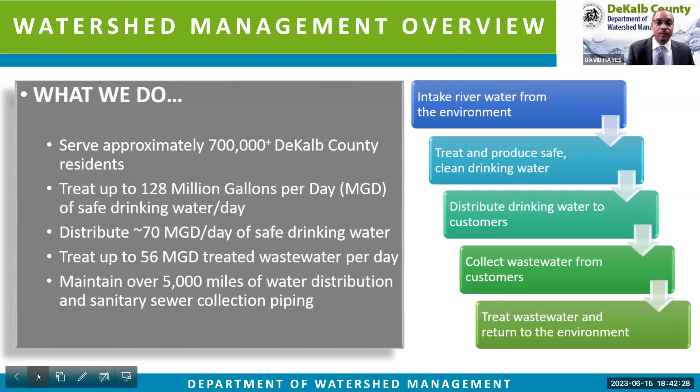So again, why are we here this evening? Well, the DeKalb County Watershed Management Engineering Division is leading this effort to decrease the water main breaks we've been having in this area, to upsize the water mains because we are continually growing as a county. We want to make this system robust and meet the needs of the public. That's going to improve our customer service, and yield a better system to allow future growth and expansion for generations to come in DeKalb County. Next slide, please.

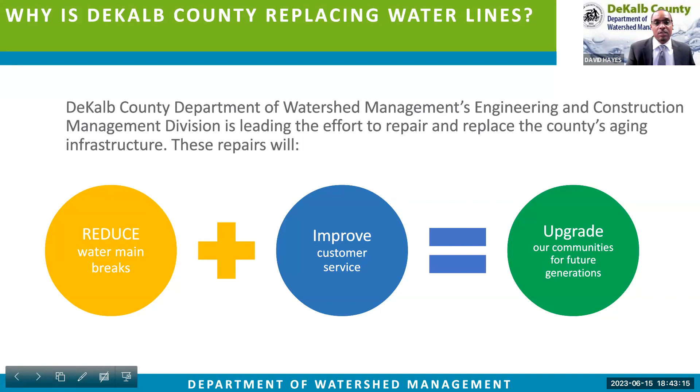This DeKalb Engineering Division put together what I call a super team, the A-team. This A-team is comprised of SDC, the company who's going to help—they're going to be the boots on the ground, putting this pipe in the ground. They're going to be overseen by AECOM and CGA Solutions, engineering firms who have helped us design the project, and who will help us manage the project to make sure the pipe goes in the ground on time, hopefully under budget, and with as little negative impact to the community as possible. We're here to do a great job, but we have to inconvenience you somewhat, so we're hoping with this A-team that the inconvenience is very reduced or minor.

Next slide, please. So next you're going to hear from Assistant Director Cassandra Marshall. She is the Assistant Director of our CIP group, our Capital Improvement Project group, and she's going to tell you more detail about why we're here and what we're going to do to correct this situation.

Ms. Marshall: Thank you, Director Hayes. Good evening. Again, my name is Cassandra Marshall. I'm the Assistant Director of the CIP program for Watershed Management. I have over 20 years of experience in construction management. I'm also a licensed water professional and a certified project manager. So in the next few slides, I will provide an overview of the system problems and our solution to repairing the aging water system.

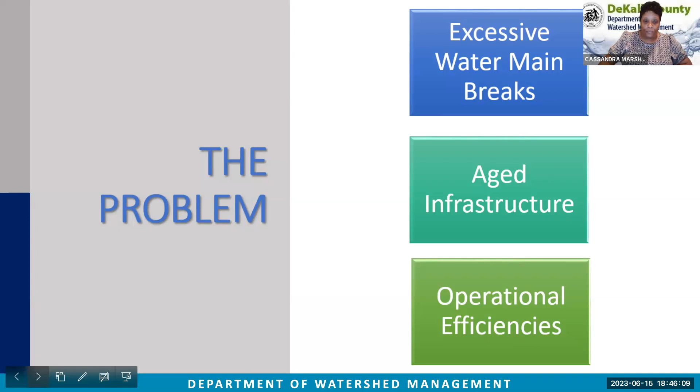At this time, I would like to discuss the county's first hydraulic model, completed in 2019. The county has over 3,000 miles of pipe in the water distribution system to maintain and provide drinking water to the ratepayers. We also have 4 pressure zones, 21 storage facilities, 16 pumping stations, and 6 pressure regulating stations. As you can see, this is a large system to maintain.

Most of the system is aged and cannot be repaired or replaced all at once. Therefore, the county had to develop a best practice way to evaluate and prioritize how and when the pipe will be replaced. The first objective was to create the model. A hydraulic water model is a computer simulation of the water system that can provide a big picture look at how the system should be functioning. To develop the model, we used the county GIS data, metadata of water usage from the billing system, and system facilities such as water storage facilities and regulating stations. This data was ultimately used to develop the county's first master plan, and it was used to prioritize the CIP projects. Next slide.

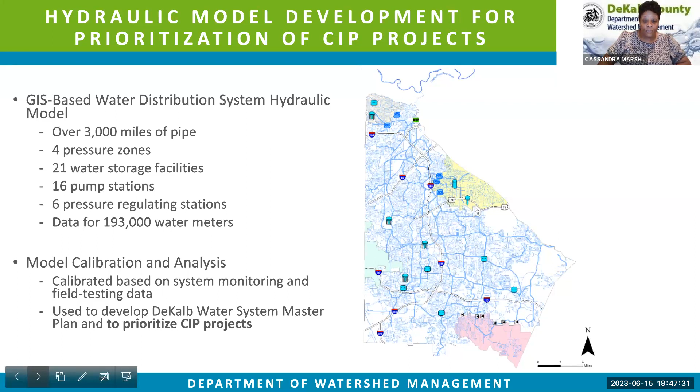So to this point of the presentation, you heard about the problem and the development of our replacement plan. Now I will speak about the solution and the execution of the CIP project.

So what does CIP stand for? Well, a CIP, or capital improvement project, is a project that helps maintain or improve an asset. It can either be new construction, an expansion, renovation, or a replacement of existing infrastructure.

In 2021, the Board of Commissioners approved a new CIP program for $2.4 billion for projects to be completed from 2021 to 2030. The Drew Valley Water Main Replacement Project is an $8.5 million project included within that plan. My team, the CIP team, is responsible for getting that work done.

My team includes 4 DWM construction managers and 12 licensed inspectors. Later in the presentation, you will also hear from the DWM construction project manager, Mr. Bacchus Jackson, who has over 10 years of construction management experience and is a licensed water professional. Along with in-house staff, we are also supported by consulting firms who help assist the county with construction management and inspection services.

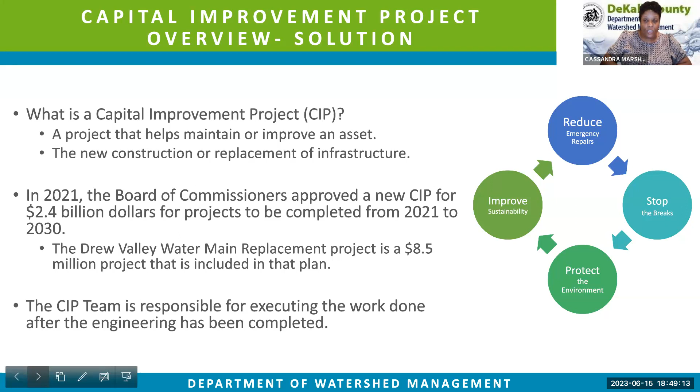What we want you to know is we're here to help. We want to reduce or eliminate emergency repairs. We want to stop the breaks. We want to protect the environment. And finally, after the project is complete, it will improve sustainability to the system. These improvements should last a minimum of 70+ years.

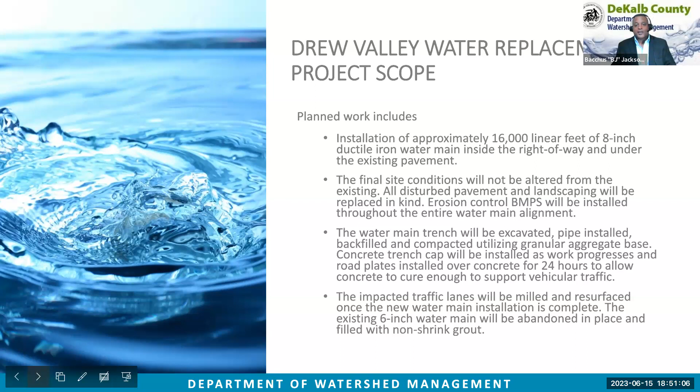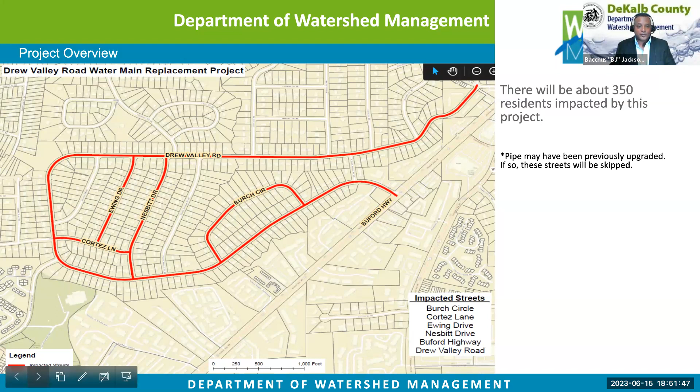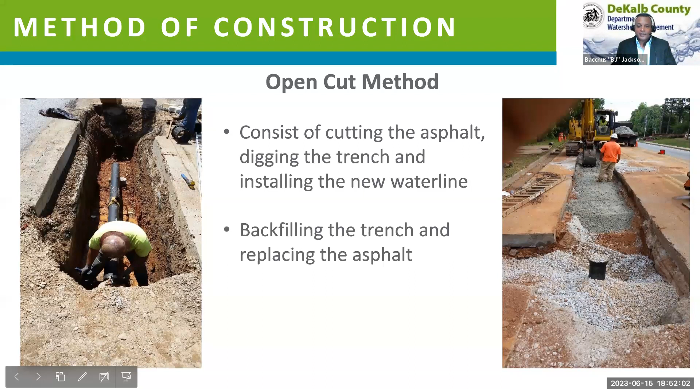Slide. The method of construction will be open cut. As you notice the illustrations here, it consists of cutting the asphalt, digging the trench and installing a new water line, and backfilling the trench and replacing the asphalt.

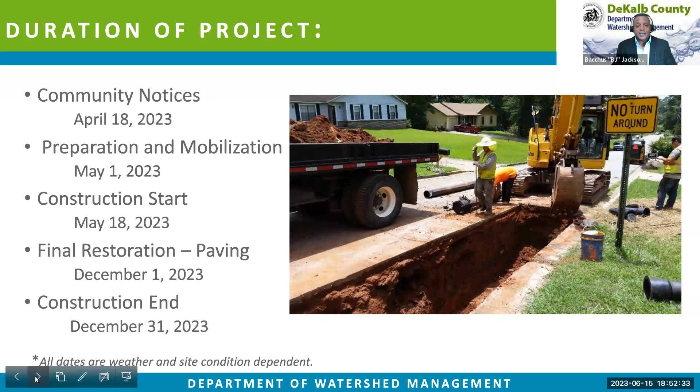Now, the duration of the project: the community notices went out April 18th, 2023. The preparation and mobilization was May 1st, 2023, and the construction start time was May 18th, 2023. Our final restoration for paving is going to be December 1st, and the construction end will be December 31st, 2023. Now, all of these dates are weather and condition dependent.

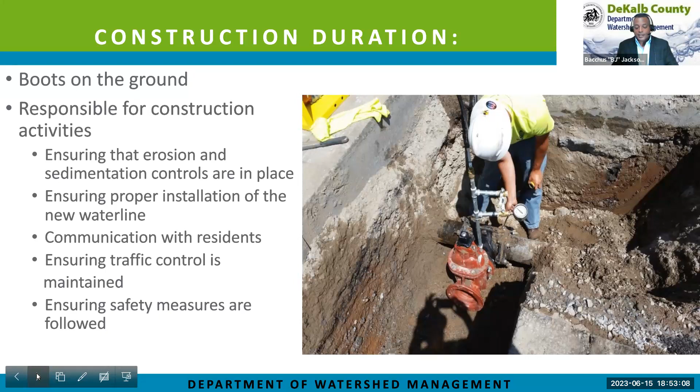My team and I are the boots on the ground and the first line of contact for the project. From the first day of commencement, my team will be on site to ensure that construction activities are carried out properly, including ensuring that erosion and sedimentation controls are in place, ensuring that the contractor is installing the pipe according to the contract documents, drawings, and specifications, ensuring that all safety measures are in place, and ensuring that all trenches and holes are backfilled and secure for that particular day.

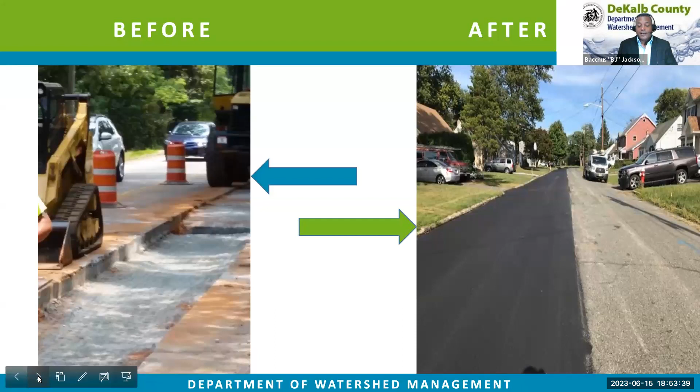Now I will turn this back over to Ms. Cassandra Marshall, who will discuss community awareness. Thank you, BJ. At this time, I will address community concerns and what the community should be aware of.

So what to expect? Well, there's going to be inconveniences. However, the short-term interruptions provide long-term results. Once we replace the pipe in this area, as previously stated, these improvements should last a minimum of 70+ years.

During construction, you're going to see a lot of construction traffic, foot traffic, vehicles, large dump trucks, and heavy equipment. There will be construction workers, county employees, and contracted workers throughout your communities. There will be material and equipment deliveries by means of large tractor trailers. However, the crews and flaggers will guide these large vehicles in and out of your community. As a security measure, all county contractors and county employees will have an identification badge and marked vehicles.

There will be increased noise from the equipment backup alarms, heavy equipment usage, and saw cutting of the asphalt. This noise will be in your area during work hours of 7 a.m. to 7 p.m. Monday through Friday, and sometimes weekends. Residents will always have access to their driveways during construction, and notifications will be distributed prior to any water disruption.

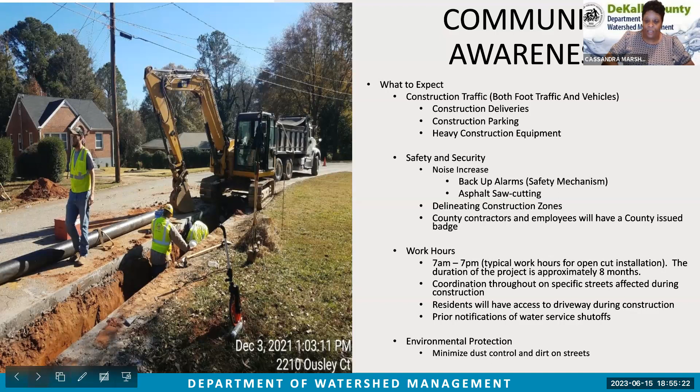Next slide. You will now hear from Ms. Alicia Penny about public communications updates.

Thank you, Assistant Director Marshall. Good evening, everyone. My name is Alicia Penny, and I am the Public Relations Manager for the department. I have been with the county for 20 years, and for the past 10 years have served in the role of Public Relations Manager. We thank you for joining us tonight because we understand that in order for this project to be successful, we have to partner with the community.

And so tonight we are going to talk to you about the methods that DWM will utilize to communicate with you about this project. Next slide, please.